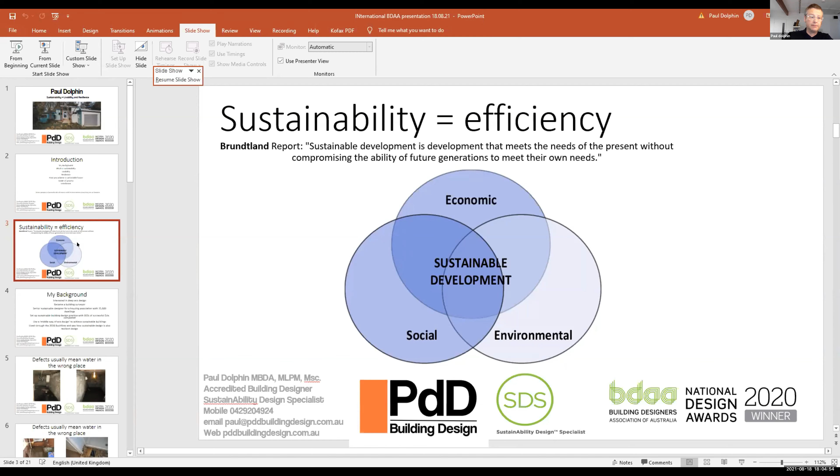So my background, I've been interested in building design my whole life. And when I was at university, I was very interested in deep eco-design and using materials such as straw bales and rammed earth and lots of alternative things. Then I became a building surveyor and I surveyed 5,000 houses in the UK. And I realized that often when we have defects in buildings, it's when we're not using materials correctly. And that can often be the case when it's new materials or materials we don't fully understand.

So I then used that knowledge to think about how we can deliver sustainable design which doesn't cause defects, doesn't cause us future problems. And that's where really I came up with this idea of middle way eco design, where we use off-the-shelf products to achieve a sustainable building. And then more recently, my experiences in the 2020 bushfires really proved to me all the work we've done over the years and how sustainable design is also linked to resilient design.

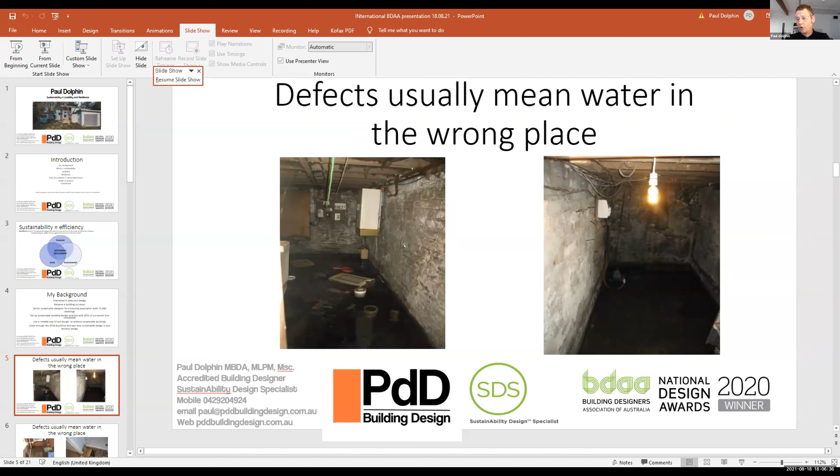So just when we're talking about defects, here's a few photographs from the UK. This was when I was doing housing surveys. And this is just some extreme examples of defects. You can see in the back there is the gas meter, the electricity meter, and in one of them, the gas boiler. And you've got to wade through waist-high water to change a fuse, which is not ideal. Here we've got a blocked drain, which is causing rising damp. And here we've got a badly detailed shower screen, which has leaked, and you can see the kitchen down below.

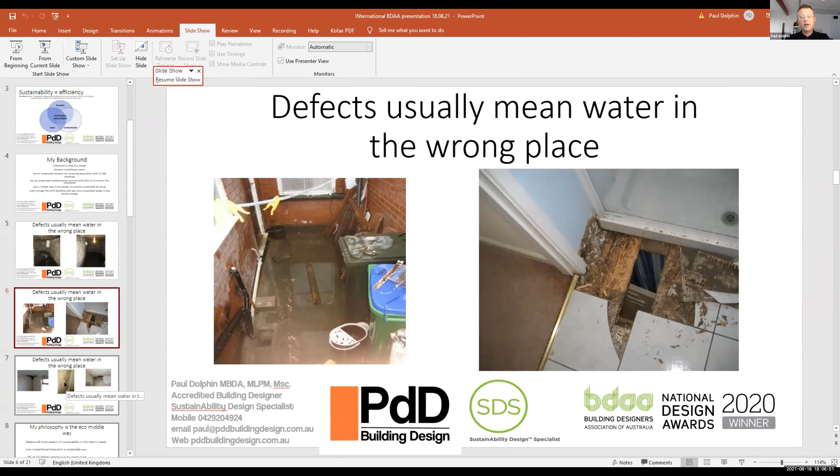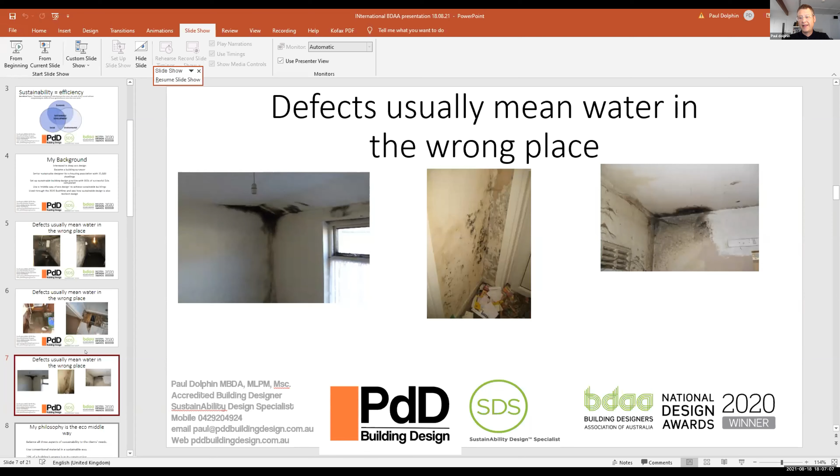So defects usually mean water in the wrong place. These are images of damp, and it's either water penetrating through the building fabric, rising damp, or interstitial damp. And so we really want to avoid those in our designs. And that's why we use conventional materials to the best of our ability.

So this idea of the eco middle way, using conventional materials. 20% of a building's energy is in its construction. 80% is in its running costs over its lifetime. So really, as long as we get a low energy building, it's not 100% crucial what we build it out of. Obviously, we want to encourage people to use materials such as WeatherTex, which is sustainable and has a low carbon footprint. And we want to encourage our manufacturers to keep moving in that direction. But if we can't get it off the shelf, then it's not the end of the world. We don't have to go to the nth degree to look at our products.

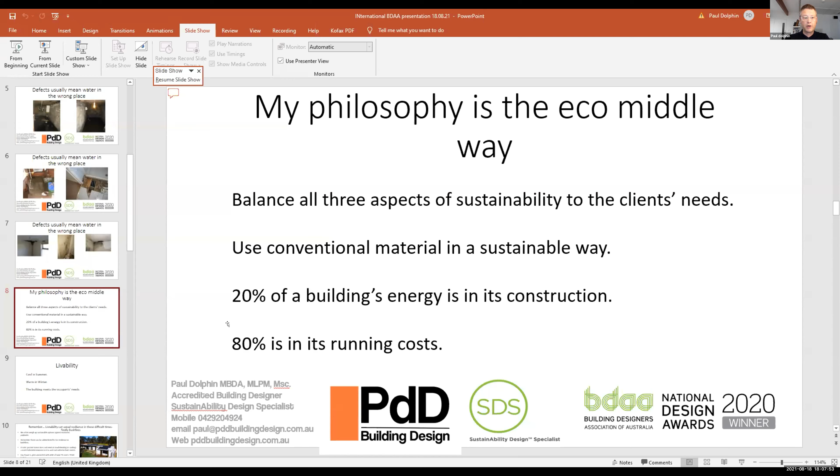Livability. So livability is sort of the social side of sustainability, really. And it's kind of the side that got forgotten for a little while. But we can encourage our clients, or if you're out there looking at a building design, livability is how you're going to experience that building.

And with the pandemic in the last year and a half, it's been quite critical how we live and experience our buildings. So really, in simple terms, cool in summer, warm in winter, and it meets the occupants' needs. Clean air, good cross ventilation, zero VOCs or low VOCs. All those things. Natural light, how you feel in the space, they all count towards sustainability.

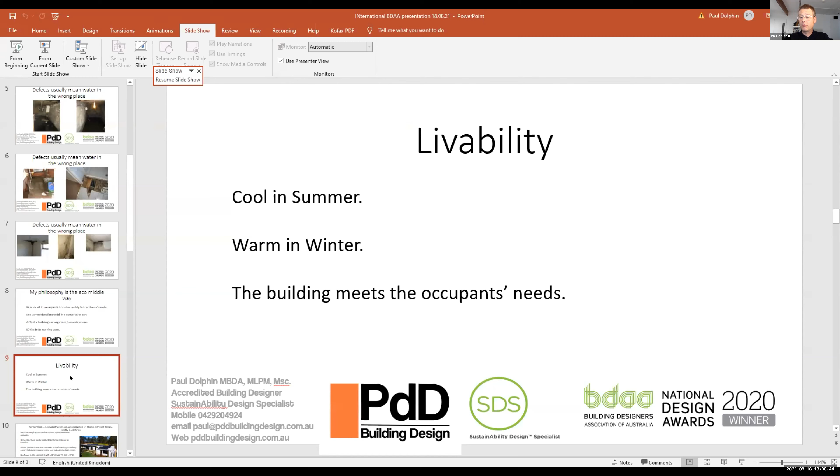Then the next side of sustainability is resilience. We often weigh up sustainable decisions against economic paybacks. If I put solar panels on and a battery, how many years is it going to pay me back? We don't really think about that when we think about our nice kitchen bench or fancy taps. So it's strange that we apply that economic logic to sustainable measures only, and not some of our other choices. Whereas actually, if we think about them in terms of livability and in terms of resilience, it can be very beneficial.

So we lived through the fires, burnt to our front door and around those trees that you can see in that image. They were all burnt in the fires. We had close to 6 weeks with intermittent power. We still get intermittent power. And we have 6 kilowatts of solar with a 7 kilowatt hour battery, which has an EPS system. So it's got an emergency power supply.

So throughout that time, our fridge was running. We had power to charge our phones so we could look at the RFS mapping and get all the latest news. And we had cold milk for tea during the day and cold beer in the evening, which is pretty much all you need to get yourself through a catastrophic fire event like that.

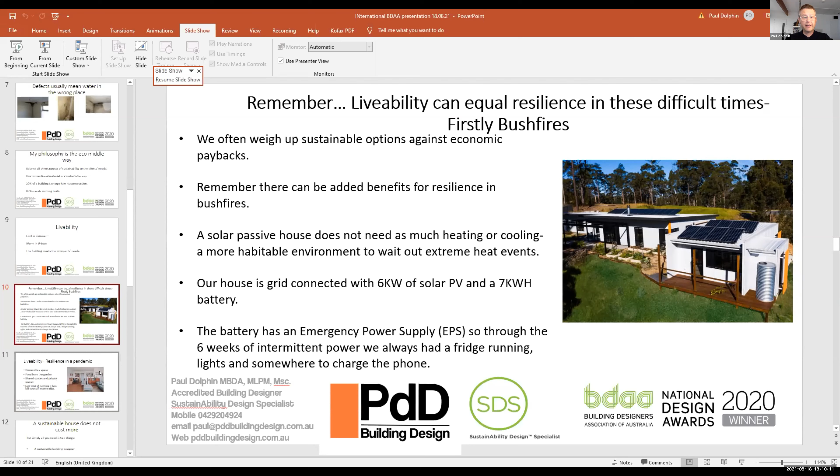And then livability in terms of resilience in a pandemic. We have been incredibly fortunate that we are living in a sustainable house through this period. So we have a home office space, food from the garden. Thinking about those shared spaces and the private spaces, you can have a child working at the kitchen bench while you're cooking, but equally we need private spaces so everyone doesn't get on top of each other.

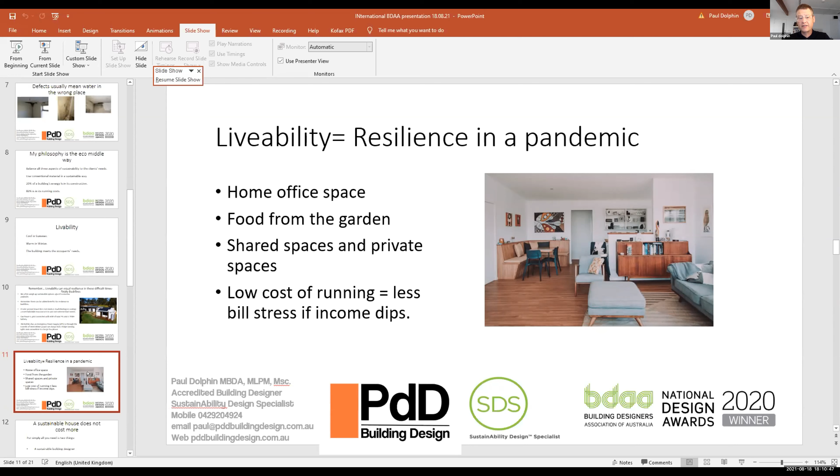And also don't forget, our house costs nothing to run. So if our incomes dip a little bit, it's less stressful for us. A sustainable house doesn't cost more. All you need really for a sustainable house is a sustainable building designer and a sustainable builder.

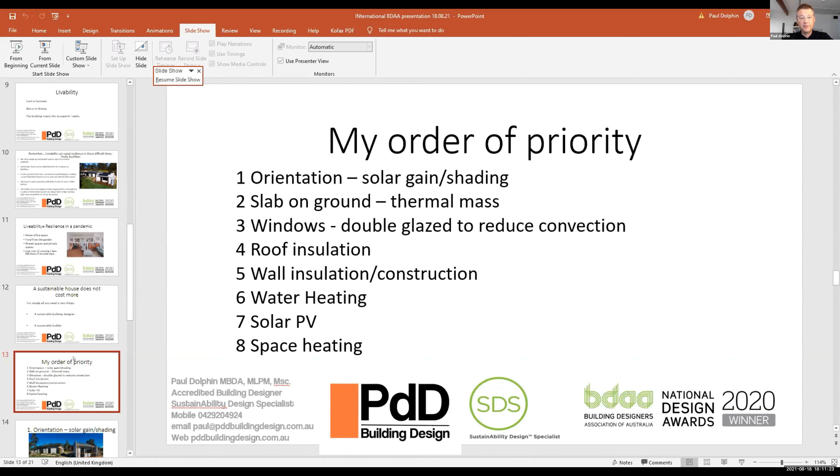Okay, I'm going to fire very quickly through our order of priority, what we would tackle. I have to say this is specific to relatively mild climates in Australia. I think if you were watching this from the UK, Sweden, Canada, then space heating would be a lot further up. It would be probably somewhere around 2 or 3, really.

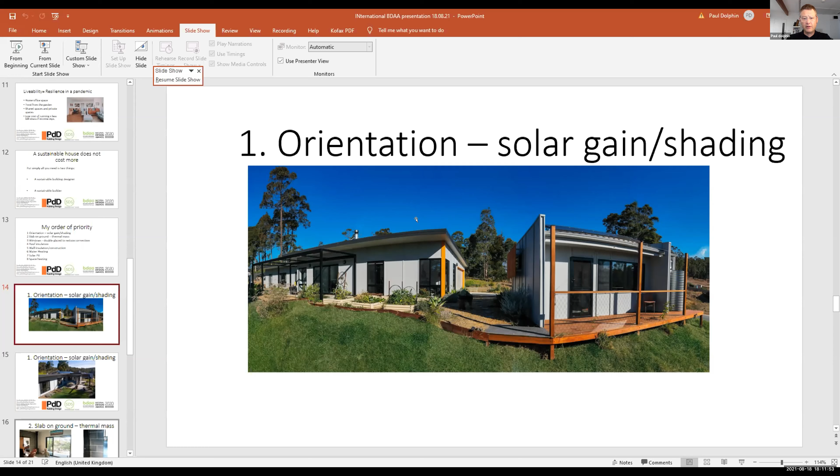Absolute crucial thing is solar orientation. So in the southern hemisphere, we're orientating to the north, and the opposite in the other hemisphere. Even in the UK, you can have a fully solar passive house with no active heating or cooling. Our house is 90% solar passive. We have a wood heater which goes on half a dozen times a year, and you can see the shading working really well. This is a winter photograph, and this is another winter photograph here.

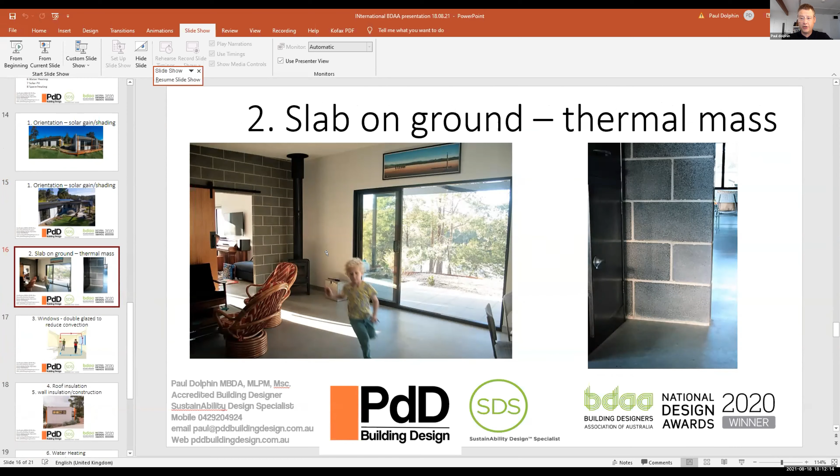The next thing is thermal mass. Thermal mass works like a hot water bottle. In winter, you charge it up with heat, and then it's going to keep you warm through the evening. In summer, it works like an ice block. You put an ice block in your esky, it keeps your food cool all day.

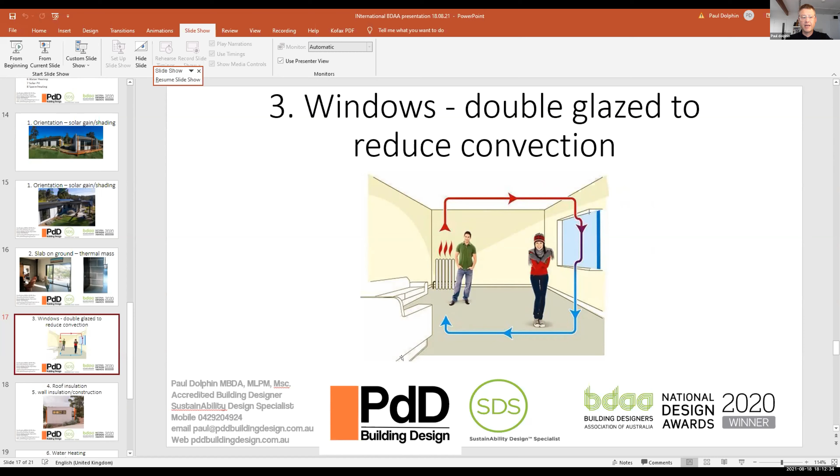Double glazing. Double glazing is really important. It reduces convection. So when we feel air movement over our skin, it cools us down, even if the air temperature doesn't drop. That's how fans work. So double glazing is really important and good window fixtures, because it actually stops air movement, and that works towards livability as well. Roof insulation, wall insulation is important, but just remember there's a diminishing return on that.

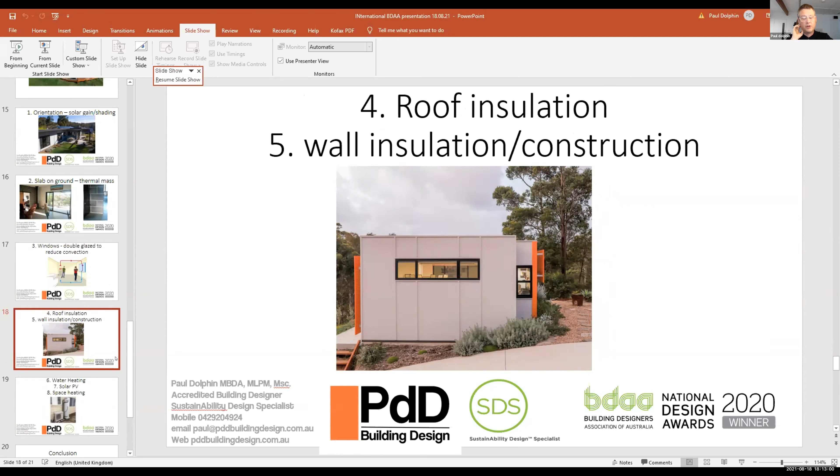If 1 foot of insulation stops 95% of the heat loss, then another foot stops 95% of 5%. So there is a diminishing return. More is not always better, or you won't get your money back, basically.

Water heater, we would always recommend heat pumps. Not sure if I can say the brand, but we would always recommend heat pumps. Coupled to solar PV, very efficient way of doing it. Space heating, if you need it, a wood heater is good, but there are issues with particulates. If you can link your space heating to solar PV and then to a heat pump, I think that's the way to go, whether it's underfloor or radiators.

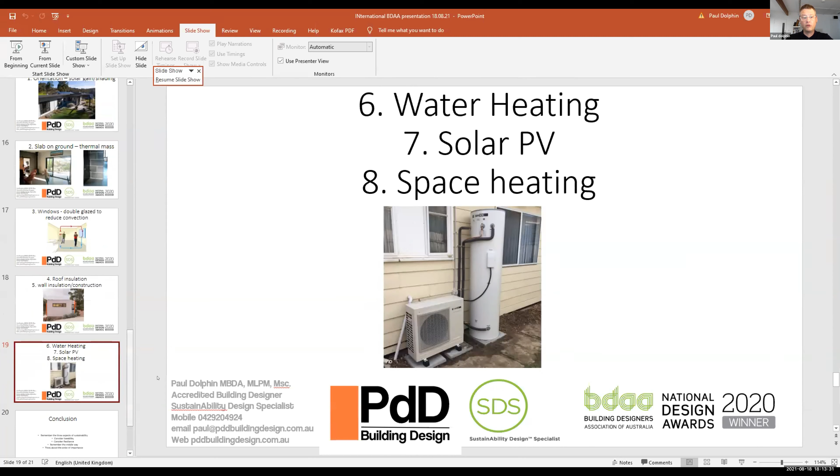And that is me all done. So remember, when you're thinking about sustainable design, consider the economic aspects and the social aspects. Consider livability, particularly with pandemic design, and resilience as well. You don't have to be living in a bushfire prone area to be having power cuts, to be having storms, to be having extreme weather events. And yeah, sustainable design can help you with all these.

And also, if you have a house that doesn't cost you anything to heat or cool, it'll take you 10 or 15 years less to pay your mortgage off. So that's pretty good. And that's me all done.

Thanks very much for that, Paul. I'm sure that a lot of people got great information out of your presentation today. So just wondering, how far across Australia do you design yourself? Well, we design mostly in southern New South Wales.

Okay. And so what's the feedback from you as a designer for other designers in relation to the promotion of this type of design, where you're not just a standard designer that's going to go and meet a client. You obviously have a lot greater skill sets, and you're passionate about this. For a student that's coming on or somebody starting their business, what would you recommend to them to start to get that creative thinking like yourself?